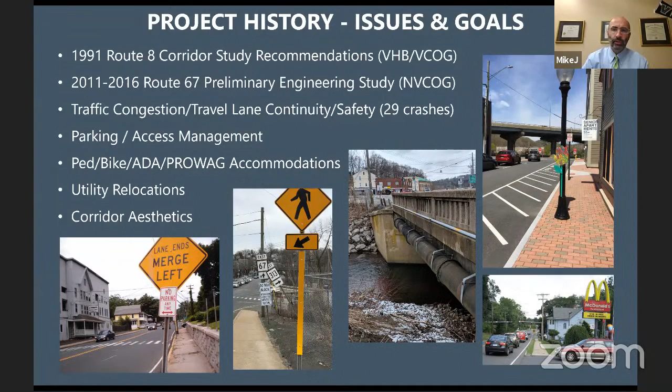As we go through the presentation, we will zoom in on different features of the project to discuss them in more detail. The main intersection improvements occur at the signalized intersection of Klarides Village, right next to McDonald's and across from Johnson Avenue, and at the intersection of Beecher Street and Church Street, where some minor improvements are also proposed. The bulk of the improvements are focused between Old Drive East and the new Walgreens intersection, down past Martha to the intersection of Franklin and River, and then down River Street.

Those of you familiar with the corridor know this area well. Johnson Avenue comes down at a steep angle, at a very sharp skew, one way, with an existing retaining wall which supports it. During the preliminary engineering effort, we looked at closing Johnson Avenue and incorporating new cul-de-sacs or turnarounds in this area. As we advanced from preliminary engineering into the design you'll see tonight, it was determined with the town and NVCOG that closing it and possibly doing a full acquisition of this property was not the best use of the money for this project.

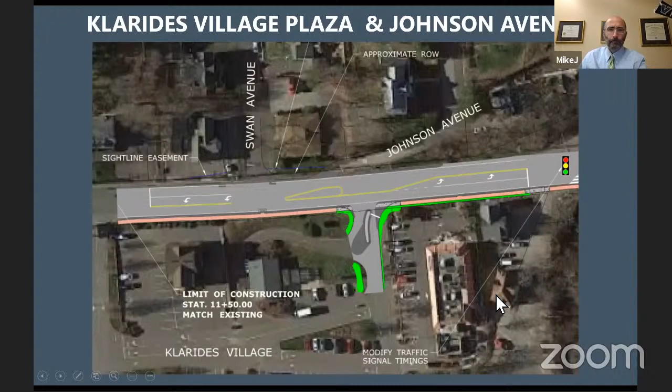As we extend down the corridor, we get to the intersection of Church and Beecher Street. During the preliminary engineering study, we had several alternatives, including creating a new T intersection further up the hill with Beecher and Church, some of which required impacts to this area. There were very lengthy discussions with the Russian Club regarding the use of this area for their loading and parking in other areas. As you'll notice, as we advanced the design, we pulled back from that and are proposing something slightly different, focusing more at the intersection.

This area of the project has been simplified to provide just a bit of turning radius and space improvements at this intersection, so that a vehicle coming down that wishes to turn left onto Bank Street does not block the ability for a vehicle to get by and access Route 67 eastward. Again, Beecher Street is one way up the hill from the intersection, with no modifications. There will be a slight widening of this island in this area to allow for that new lane configuration.

To help with the direction of traffic, this island here will be a flush island, but it'll be texturized, whether that's a concrete stamp or stamped asphalt, that has yet to be determined. There will be an island here that will delineate where the vehicles should more clearly be directed.

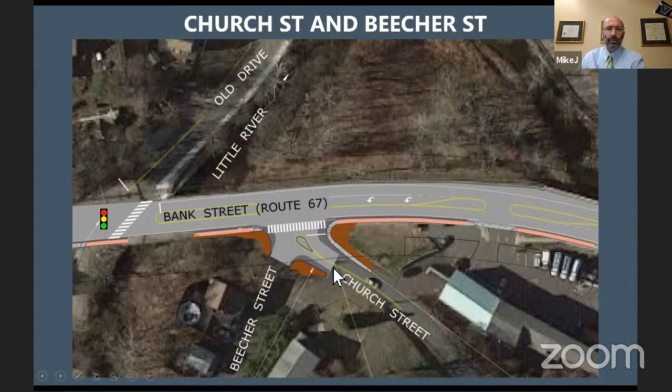As we move down the corridor, we have properties that currently exist, and while there was demolition of properties on the corner, there still exist residents and businesses on the southern side that include some on-street parking in limited areas. Across from that is the existing sidewalk condition along the slope that supports Walgreens.

In this area, we're going to be proposing to widen the north side of Route 67 to support the improvements that we'll talk about in a minute coming from the intersection.

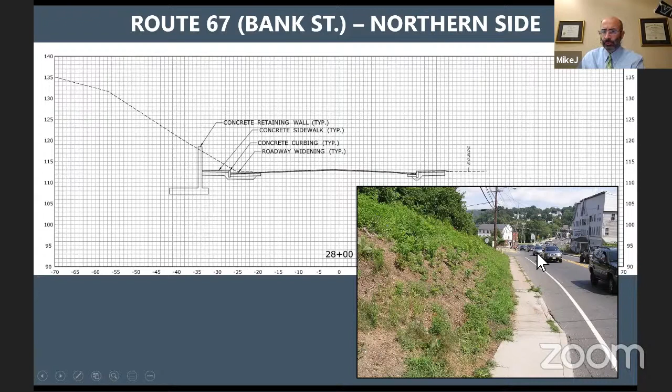As we continue down the corridor, our improvements will also have impacts to the retaining wall in front of 100 Bank Street. This sign here starts to get into the big improvement that we're going to talk about in the project, which is the race to merge as you approach Martha Street coming out of the intersection.

Again, this widening will occur in front of the retaining wall. This wall will be replaced further back. There will be some parking impacts on this property, but this wall will be reconstructed to match the existing wall to remain, so it'll be another masonry wall.

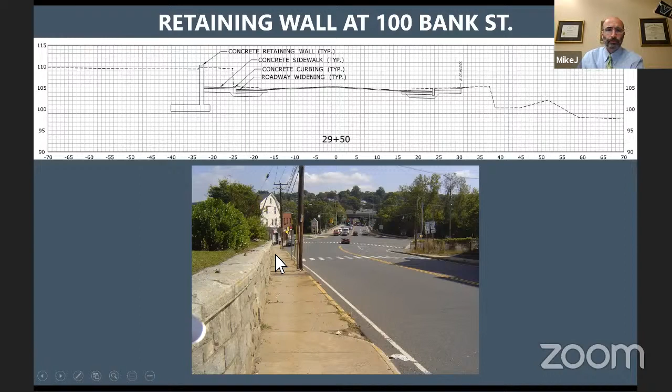So back to this area again. What we're proposing in this area is to widen Bank Street to provide 2 through lanes all the way up past Martha Street, and then an extended right turn lane that will allow right turns into Walgreens, but also a lane that stays through to Old Drive East.

This will allow vehicles that want to travel through the corridor to stay in the left lane all the way through, and vehicles who want to go to Martha, Walgreens Shopping Plaza, or Old Drive in the neighborhoods off of Rimmon can stay in one lane as well. We feel this is a significant improvement given how quickly vehicles need to race to merge currently under the current condition.

By holding the southern edge of pavement, which is different from our preliminary engineering analysis, we're able to create and establish 8 legitimate on-street parking spaces for the residents and the businesses in this section. And as we get closer to the intersection, we will get into some more improvements, which I'll show next.

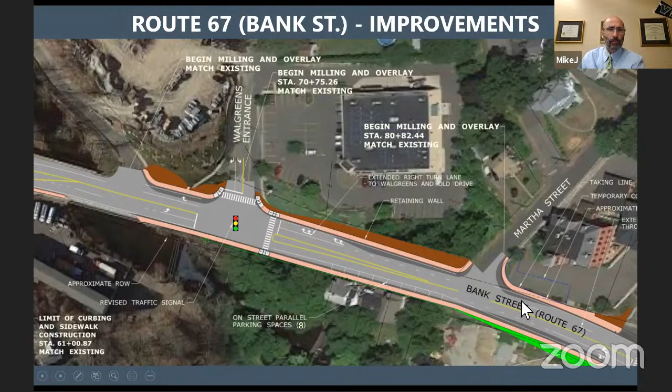This kind of looks at that intersection where the 2 vehicles that are coming out of the intersection are forced to merge before you even get to Martha Street. We'll be continuing that all the way up, and this sidewalk will be new. There'll be a wall along that side of Bank Street.

Currently at the intersection of Franklin and River and Bank, there are a couple of on-street parking spaces, which is fairly odd for a spot so close to the intersection. As we'll show next, this also creates a very long distance for pedestrians to cross, which affects vehicle timings and safety for pedestrians as well.

As you can see, this intersection is quite large, and what we'll show next is how we'll look to improve that.

We did an analysis in this graphic here. What you'll see in the pinkish color is a new brick paver pattern that will support and match the downtown area. The green areas are new vegetative areas that don't exist today.

This area through here is being tightened up considerably. There's a very large radius on the southeastern corner of Route 313, River Street, and Route 67. The turning vehicle movements that we need to accommodate do not need a radius this large.

What this offers is the opportunity to create a little more green space and more of a gateway to this portion of town by shortening the distance for pedestrians, bringing this edge of pavement out as well, which removes the on-street parking in front of these 2 businesses here, and focuses the improvements on pedestrian safety and vehicle efficiency. This project will also include new street lighting to match the downtown area.

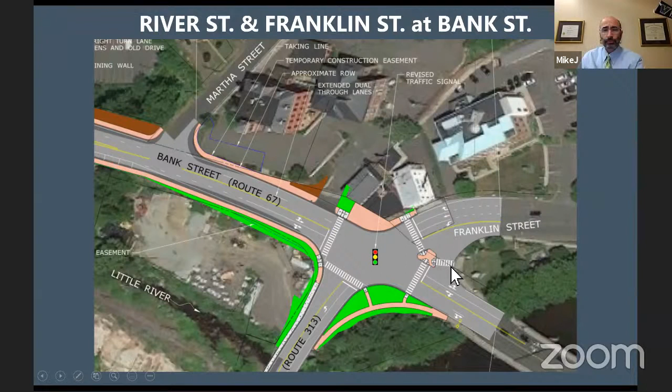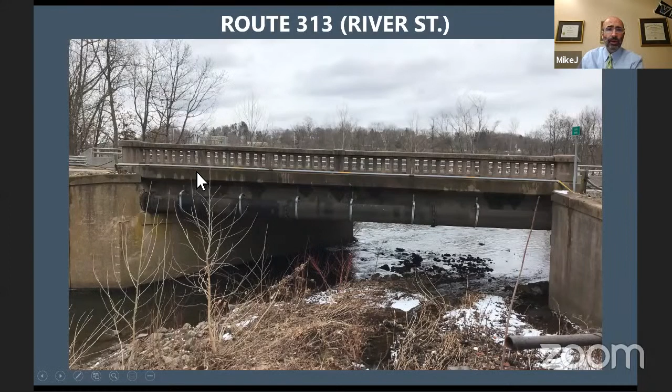As you can see in this picture, behind in the background is the improved bridge from the 2000s. This is the existing original bridge. We look to modify this bridge and widen it to allow sidewalks to come down along from Bank Street, along this western side of River Street, and connect to the existing sidewalk further down to the south.

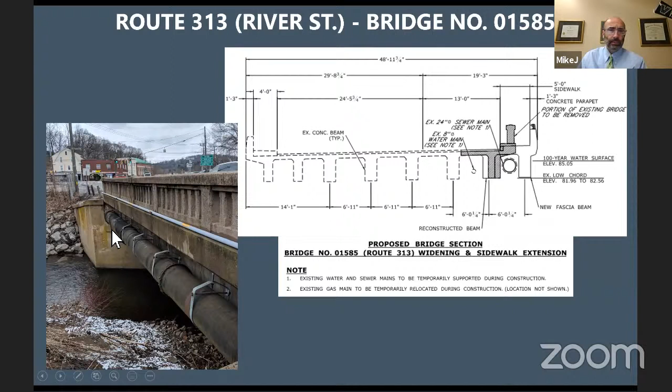This graphic shows a detail of the similar mode of replacement, reconstruction, and widening that we'll need to do for this bridge. The parapet in the picture on the left will be removed, and another beam will be established on the other side of the sewer main, which will remain in place, and the sidewalk will be constructed across the top of the bridge.

The traffic improvements for the corridor: we've captured traffic history from 2009, 2012, and 2015. Over the last year or so, it's been a little difficult to capture traffic because of the changing pandemic conditions, but ultimately about 20,000 vehicles per day travel through the corridor.

When we talk about traffic improvements, we use the term level of service, or LOS. Level of service is a measurement of delay at a signal. For a signalized intersection, less than 10 seconds of delay is level of service A, and anything over 80 seconds is level of service F.

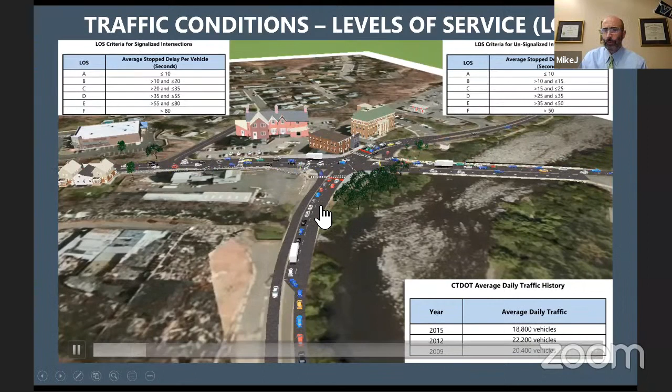By looking at the project in its model, we did a model of this using our VISSIM software to identify possible improvements. These are actual volumes projected into the future for the project, showing what the corridor may or may not be able to handle.

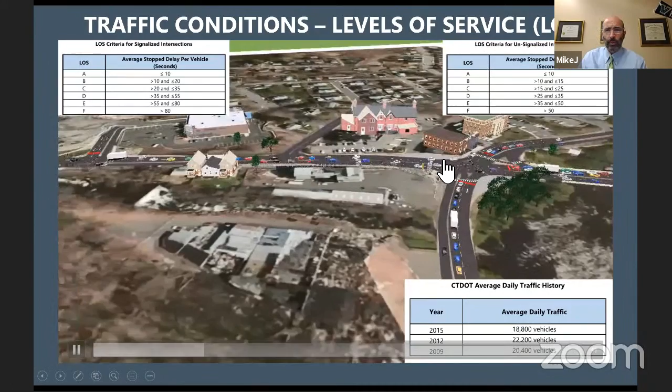As we move through the corridor, you should be able to see how traffic moves through it. Past Martha, vehicles no longer are forced to merge, but can pass with each other up to the intersection of Martha and the Walgreens Plaza, and then on again up to Old Drive East.

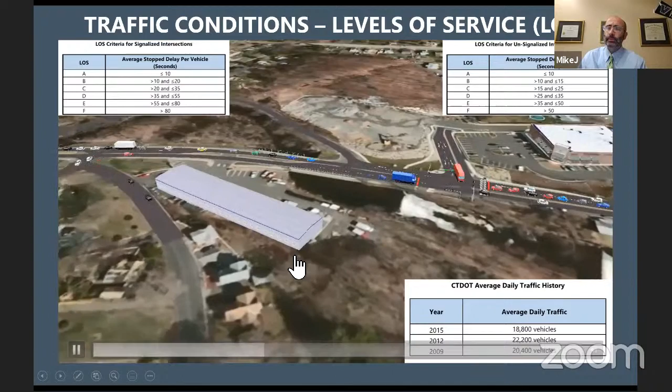This graphic may be small for some people, but as we continue past Old Drive East and Walgreens, we come up to the intersection of Church and Beecher, and again up to the intersection of Old Drive West and ultimately Claridus Village.

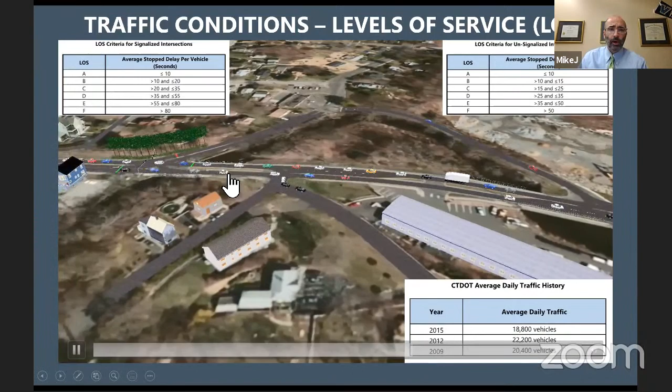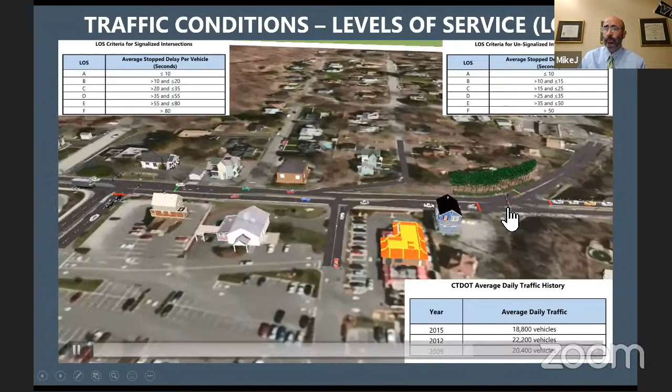The reason I bring this up is that in addition to the physical improvements we're doing in the corridor, as part of our preliminary design, Connecticut DOT traffic has asked us to include other signalized intersections in the corridor to be looked at for timing improvements and coordination improvements, so that the corridor works efficiently together, not only where we're touching the improvements, but also the timing at the signals just outside our limits.

So what does that mean at the end of the day? At Route 67, at Walgreens, at Route 313, at River Street, and Old Drive, the physical improvements we're making are subtle, but it's the timing improvements that make a difference. In many cases, we are increasing the level of service by 10 seconds or more at each of these intersections and approaches, to create relatively good levels of service.

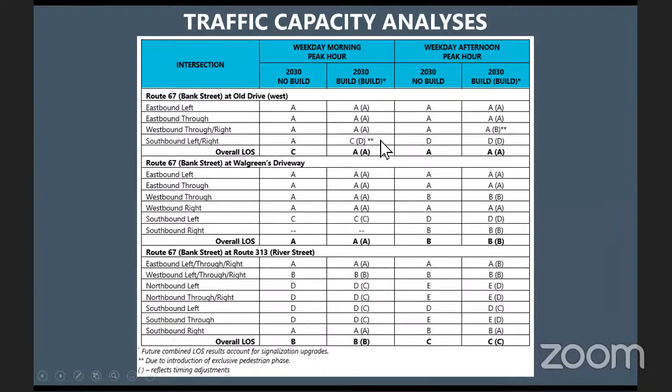You'll notice in a couple locations we have asterisks. These two locations have new pedestrian signals. Those intersections currently don't have that, but by adding it in, we do reduce the level of service, but that only happens when a pedestrian actually calls those buttons, and that occurs only up at Old Drive West where we see those reductions. We believe those will be limited instances where pedestrians are coming out there, but in case they do, they will be protected safely as an exclusive pedestrian phase.

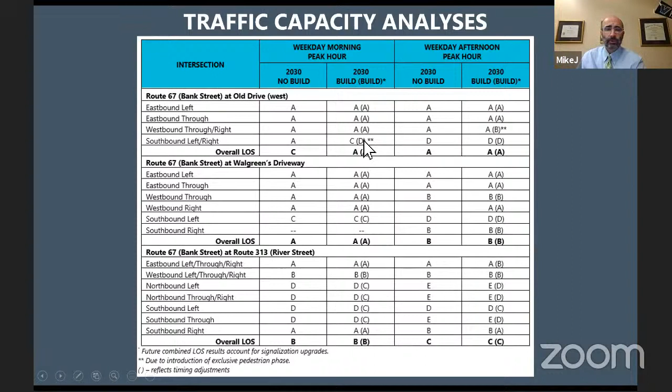Thanks, Mike. My name is Jason Boyce. I am from the Department of Transportation, Division of Rights of Way. I'm a project coordinator for the Division of Rights of Way, and I'm here to give a brief overview on the right-of-way process associated with the project. The Division of Rights of Way acquires all property rights necessary for the project. All property rights will be acquired in accordance with Connecticut General Statutes, sections 13A-73 and 13A-98E, and the Federal Uniform Relocation Assistance and Real Properties Acquisition Act of 1970 as amended.

Each impacted property owner will go through a right-of-way acquisition process. The start of the process begins with a letter of intent to acquire. This kicks off the right-of-way process and is often the property owner's first involvement with the right-of-way office. From there, evaluation will occur.

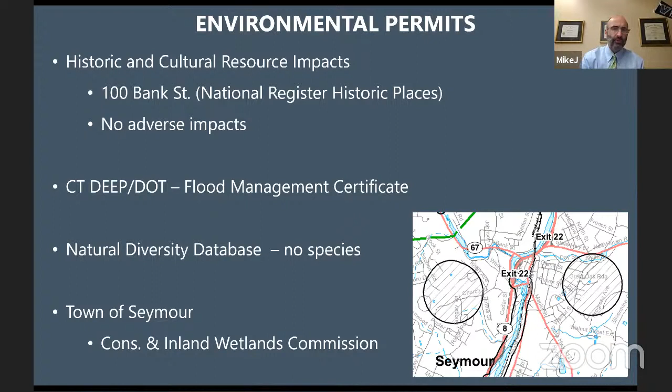As we go through all those pieces, we'll be advancing the semifinal and final design toward construction documents. So what is our project schedule?

As Jason mentioned, there's a design completion date which ties into the right-of-way acquisition funds. We need to be providing our final design plans with permit conditions, et cetera, in March of 2022. And we have a potential advertising date currently scheduled for the beginning of June in 2022.

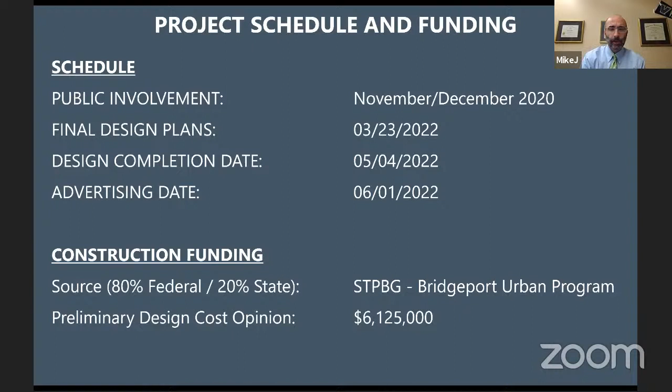Funding for the construction of the project is being funded under the STPBG Bridgeport Urban Program, where 80% of the costs are paid for by the federal government and 20% by the state of Connecticut. At this time, based upon the preliminary design that we're presenting to you tonight, the estimated cost for the project is $6,125,000, and that includes contingencies, incidentals, materials, testing, inspection, et cetera, once the project is bid.

That completes the bulk of our presentation tonight. We are available for comments and questions.

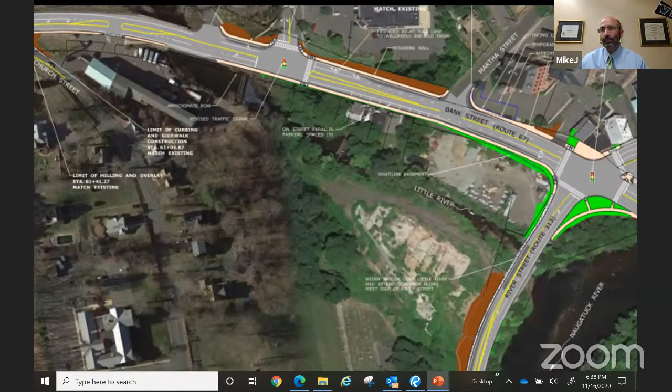Did you take into consideration the right-hand turn with the tractor trailer to make the swing? Yes. Just, yeah, because I've seen too many trucks coming through there making a real tight turn, but okay, as long as you figured that. Okay, makes sense. Thank you.

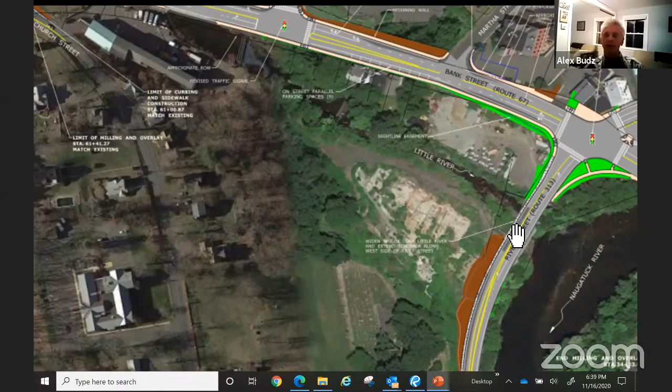And when do you expect construction on this? Current advertisement date is June of 2022. Okay, if things move faster, fine; if not, it'd be nice to be able to bid it in a winter period so they could start construction in April of a year.

We anticipate this work - there is signal work which technically takes some time to get the equipment ordered and delivered, but we would hope it would be one construction season for this work. But there is structural work for the bridge and retaining wall work in front of Walgreens, which may take some time as well. The hope would be if we started in summer of 2022, that it would be completed sometime in 2023. Very good, thank you.